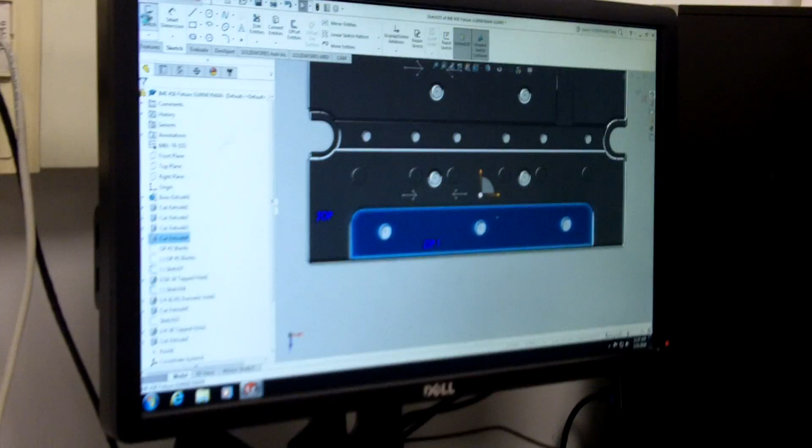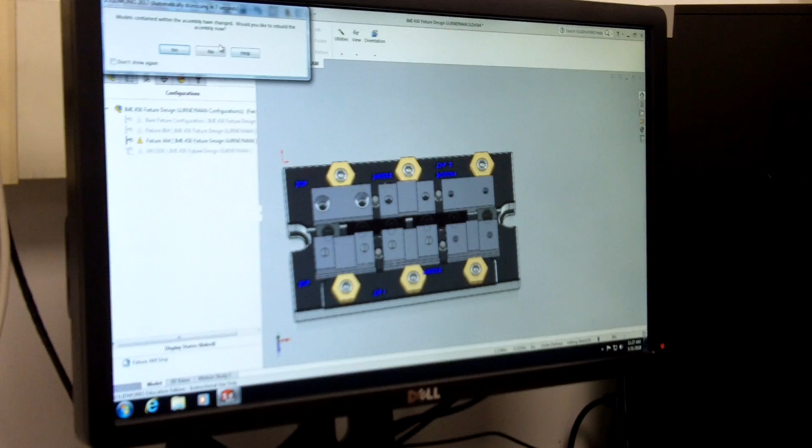The purpose of the IME 450 Fixture Design Lab project was to manufacture and test a CNC milling fixture which will hold the IME 144 Mill Project No. 2 family of parts during their CNC operations, utilizing Mitee-Bite fixture clamps, SolidWorks, HSM Works, and the Haas CNC mill. Our goal was to create a clean and simple to use fixture that would reduce operator error and allow parts to move through as quickly as possible.

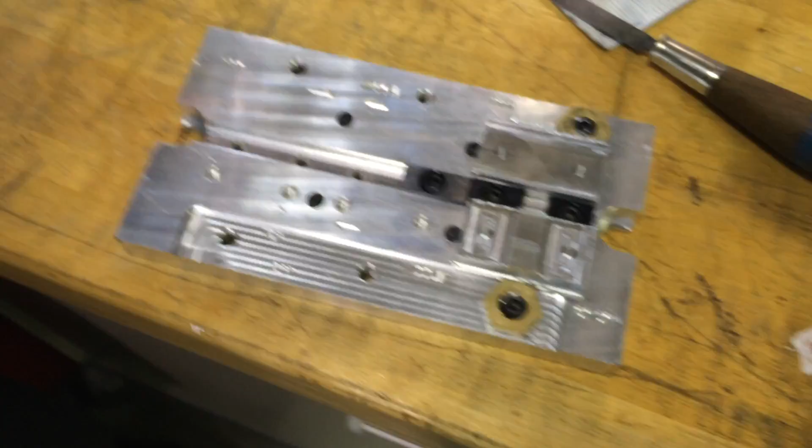Importantly, our fixture passed the 7 functional requirements: locate, hold, support, not fail under stresses, not interfere with tool paths, allow for part removal and cleaning, and not damage part surface. After those, the fixture was then evaluated with respect to cost, quality, productivity, and safety.

We started out by designing the fixture in SolidWorks and correctly calculating and placing the features that would hold the parts and prevent them from being tossed during milling. With a part model created, CNC code was programmed so the fixture could be cut.

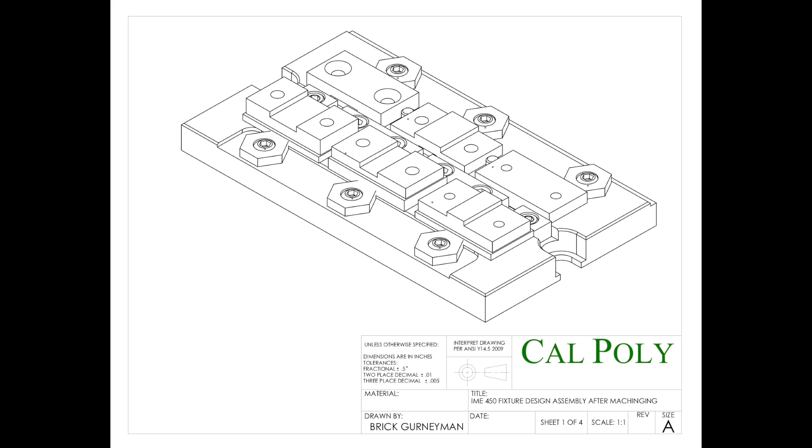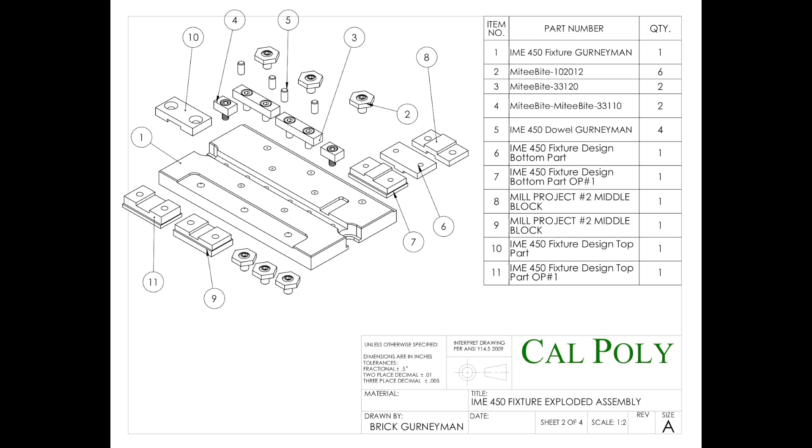Fixture design criteria and constraints are as follows. Fixture base size was given to us by Treon and was 0.625 by 4.5 by 8-inch MIC 6 tooling plate. The fixture must mount to the Haas CNC mill table on the Haas VF2 mill. Fixture must be able to be indicated parallel to the CNC machine's axes. Fixture must be capable of producing one finished part per loading cycle.

Fixture must allow the CNC program to qualify datums during CNC Op 1 and locate off of datums for CNC Op 2. Fixture load and unload time must be under 1 minute. CNC blank size was given. Clamping forces must withstand the tooling forces with a minimum safety factor of 2.0.

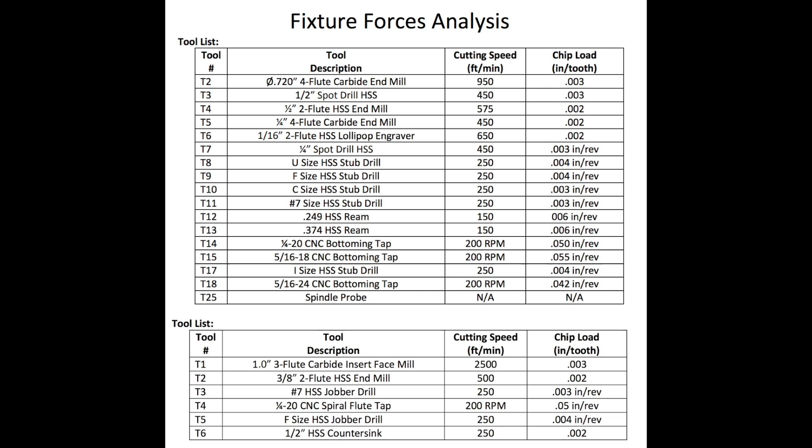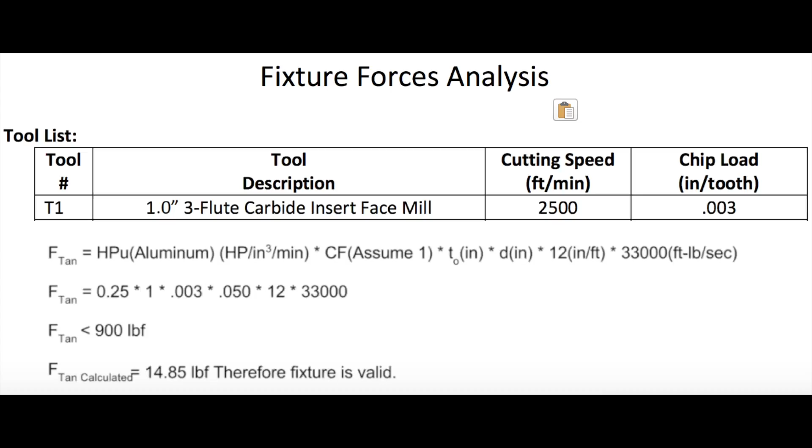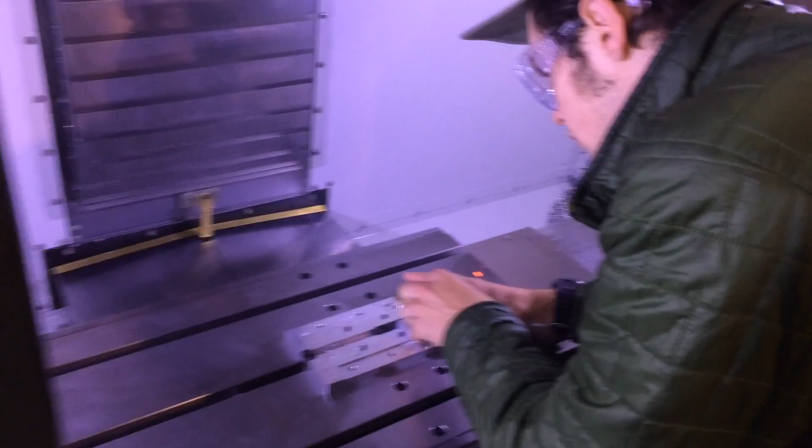We had the Mitee-Bite fixture clamps and rails given, as well as dowel pin sizes available for our design. Our design included one Mitee-Bite fixture clamp, one dowel pin, and 1 to 2 locating rails for each part operation. The flat plate was used as our primary datum, the secondary datum was the common rail, and the pins were the tertiary datum.

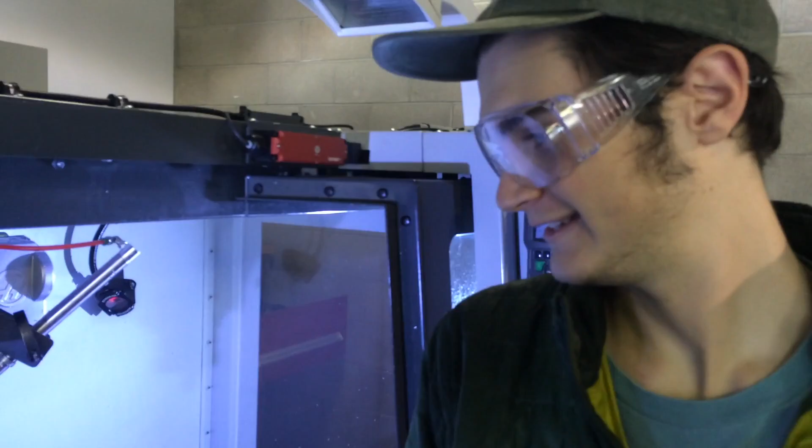Adhering to DFM guidelines, clear engravings and a minimum number of components allowed for simple, rapid exchange of parts in a single, intuitive manner. Tooling force calculations.

Using our largest cut and tool, the 1-inch facing mill, cutting forces were calculated and validated, and the 15 pounds force was significantly lower than the max of 900 on the VF2.

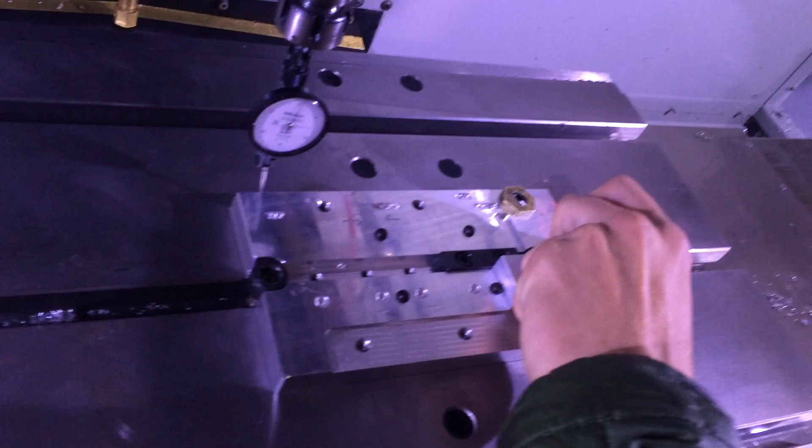To test our design, we first tested if the fixture would hold the stock correctly. After validation, we ran observations to see that the fixture still held the part in place and no tools were damaged. Observations concluded that the fixture held the parts, no parts were damaged, and the spindle was not run straight into the mill itself.

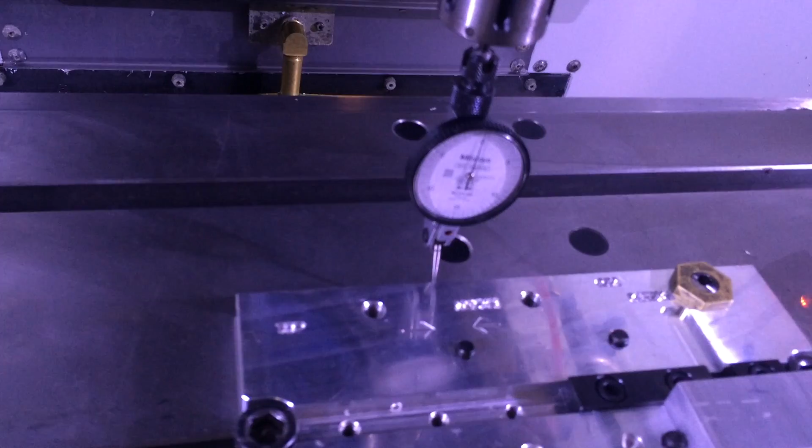Our most important results of the fixture design include a few mistakes in the fixture itself. Since we thought the stock cut edge was on the short side of the part stock, the fixture had difficulties with stocks too thick or too thin and could only accept certain sizes.

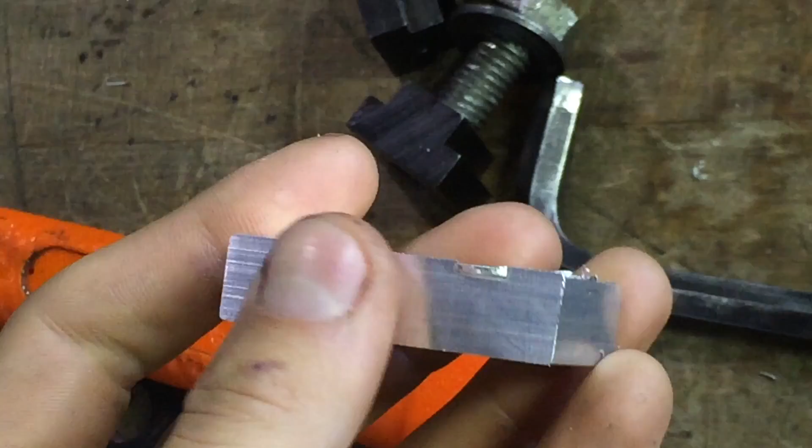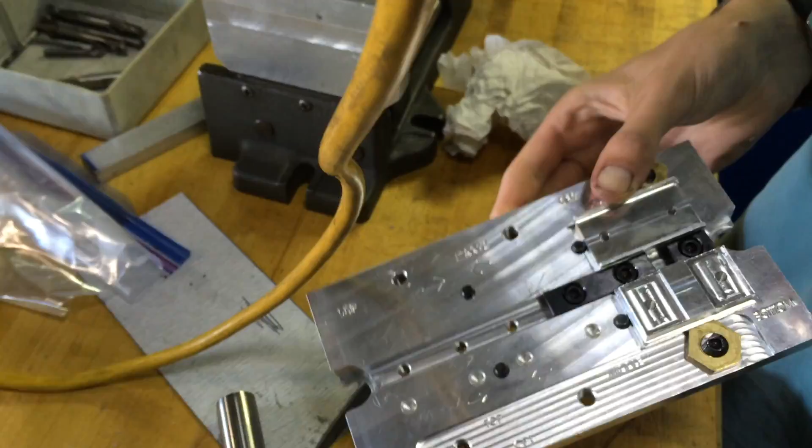Additionally, we cut our pocket too shallow for the clamping hardware to freely spin and had to manually mill it deeper. Our ops for the parts ended up biting some of the bolt's head and made it near impossible to remove the parts, to switch ops, and cut into the 1-minute constraint.

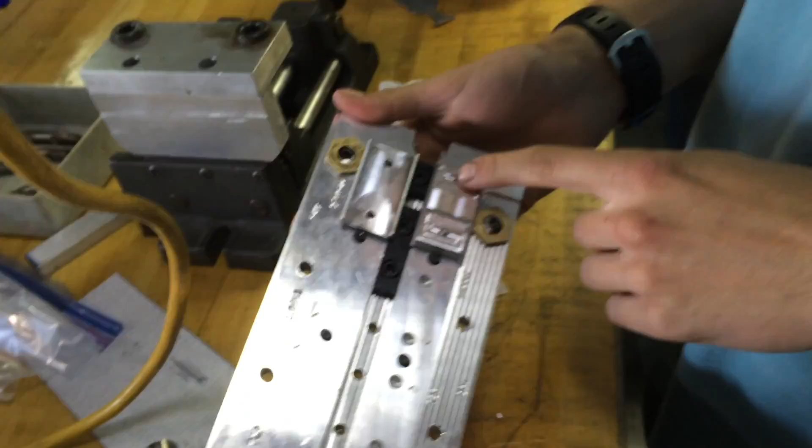Another thing we learned was that the clamping hex would contact an adjacent wall in the fixture instead of engaging the part. We caught this and fixed this design before running blocks. We learned that precision placement of the clamping hardware and fixture design is critical to its functionality.

With these bugs worked out, our fixture is an efficient design capable of doing large, hard batches with fast removal and reloading.

With this project, we successfully manufactured and tested a CNC milling fixture based on an established list of constraints and criteria. Part changeover needed to be quick and the fixture should hold a high number of parts, 6.

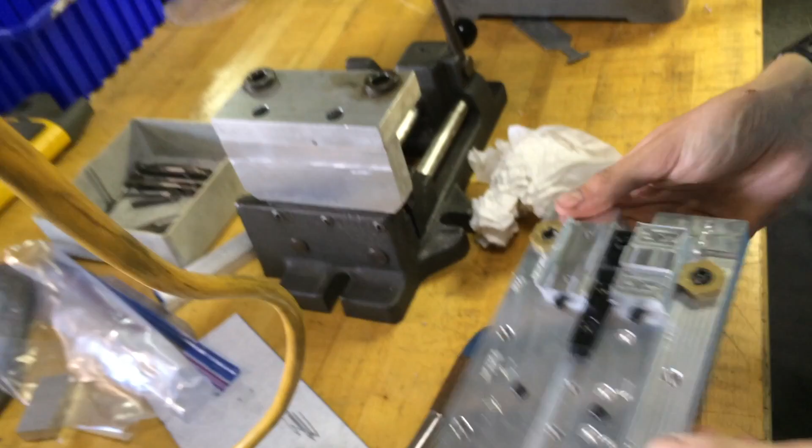The fixture needed to have blunt edges and corners for operator safety as well as indicators for proper block alignment and loading. A revision to this design would hold the blocks on their short edge for consistency and clamping.

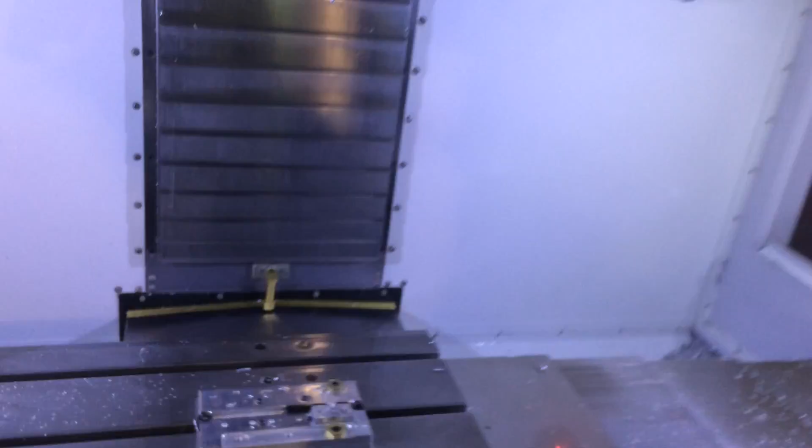We had a short block that was rattling around during machining. The plate's mounting holes would be more robust for fixture durability, and sharp edges and corners would have a deeper chamfer to prevent excessive operator blood loss.

There were to be a bit more accurate placement of the mounting hardware and dimensioning of its surrounding features as well.

We were satisfied with the end result and learned more about fixture design, CAM programming, using the CNC mill, and troubleshooting many problems that arose. We now know to quadruple check our CAM cutouts, tool selections, and proper contours.